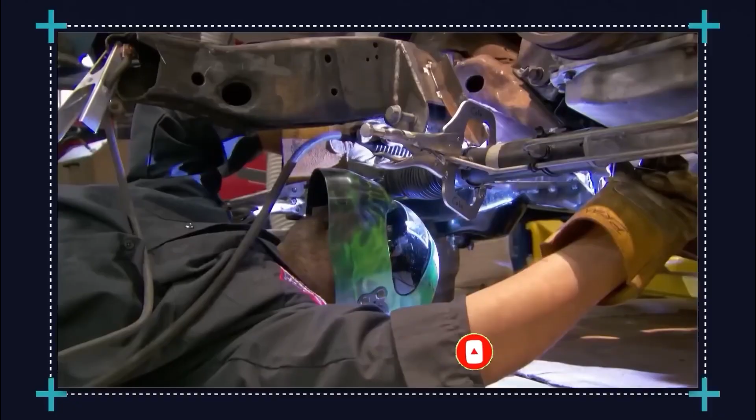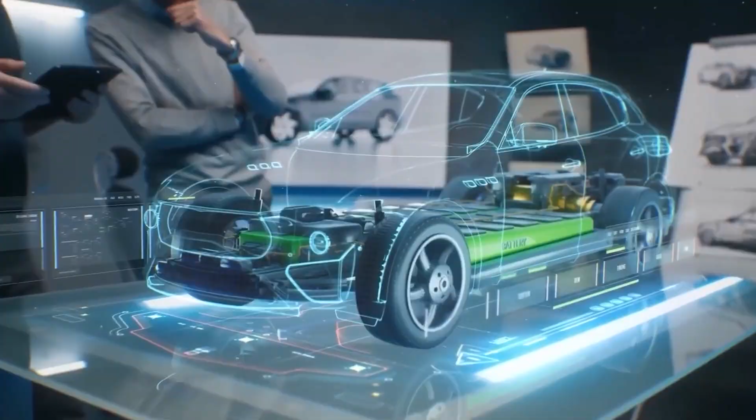It's very hard, this is a very hard thing. A technology so revolutionary it could reshape the entire automotive landscape. It's physically possible, so I think we can do it. Every truck that we put on the road that replaces a diesel truck is a huge amount of leverage, and so that is why we're doing this, and it makes a huge difference towards driving us towards our total mission of sustainable energy and transportation.

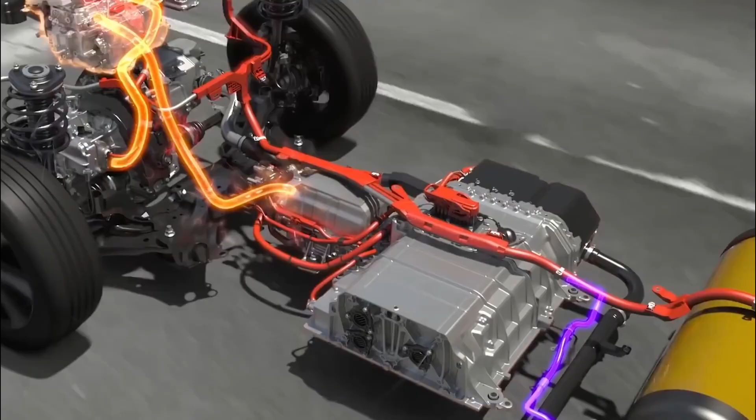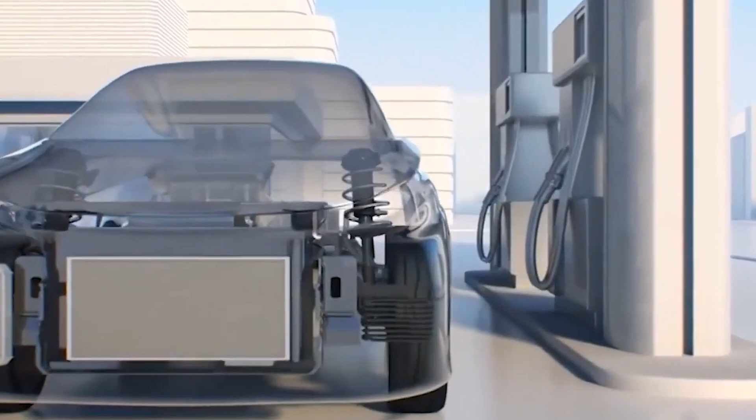Elon Musk, the visionary behind Tesla, SpaceX, and countless innovations, may be on the brink of doing just that. You know, people always want to know what our next product is. We are actually building a new product. We are actually designing a new product, two new products, that I think you will be very excited about.

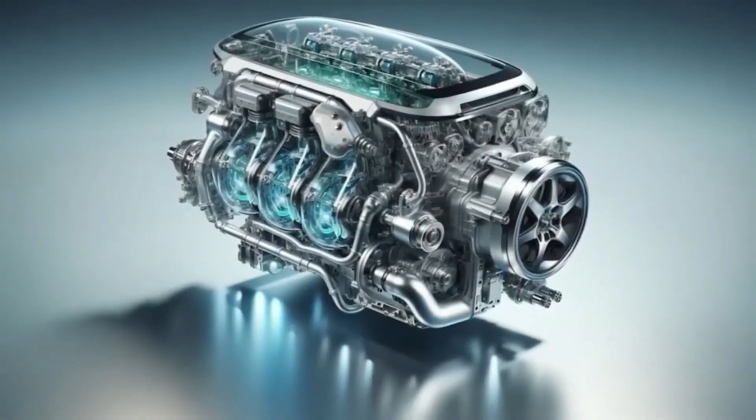Elon Musk's vision has always pushed the boundaries of what we consider possible. From electric cars to reusable rockets, his name is synonymous with innovation. But what if I told you that his next big idea could change the automotive industry in ways we never imagined?

Today, we're diving into the world of water-powered engines and discussing the rumors and facts surrounding Musk's reported interest in this technology. For years, the concept of water as a fuel has captivated scientists, engineers, and dreamers alike. The idea that something as abundant as water could power our vehicles, potentially eliminating the need for gasoline and reducing our carbon footprint, sounds like something straight out of a science fiction novel. And yet, as we'll explore, it might be closer to reality than you think.

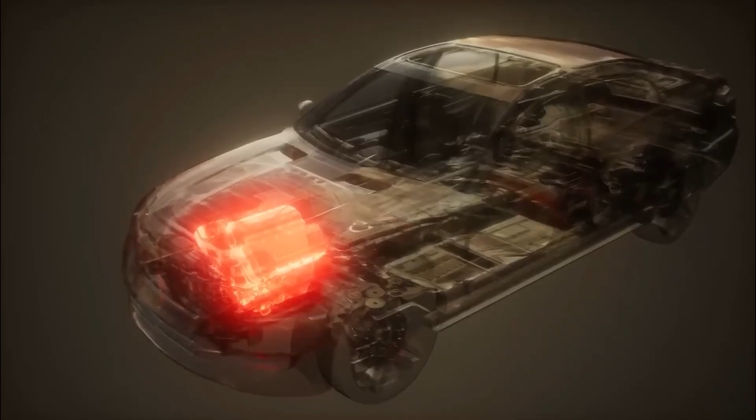Water-powered engines, or hydrogen fuel cells, represent one of the most fascinating alternatives to traditional fossil fuels. Unlike electric vehicles that run on lithium-ion batteries, hydrogen fuel cells generate electricity through a chemical reaction between hydrogen and oxygen. The byproduct of this reaction? Pure water. No greenhouse gases, no toxic emissions, just water vapor.

While the idea of using water to power vehicles sounds revolutionary, the technology behind it is complex. Hydrogen fuel cells split water molecules into hydrogen and oxygen through a process called electrolysis. Once separated, the hydrogen is stored in fuel cells where it can react with oxygen to produce energy. This process generates electricity that powers the motor, much like a battery in an electric car.

For years, hydrogen fuel cells were overshadowed by battery technology due to the latter's growing popularity and advancements in battery life and efficiency. Companies like Tesla, spearheaded by Musk, have invested heavily in electric vehicles, or EVs, effectively positioning batteries as the future of the automotive industry.

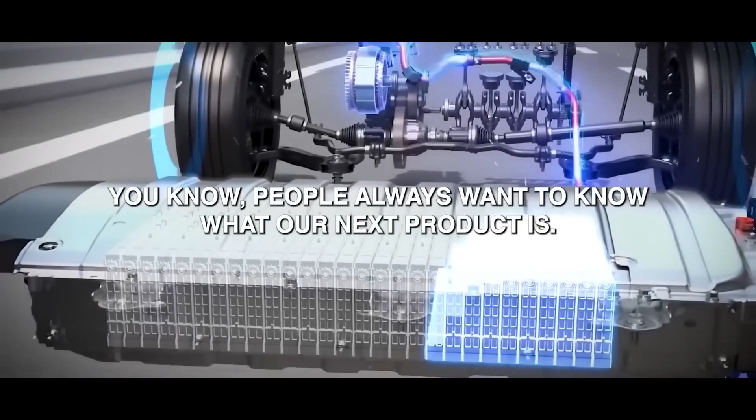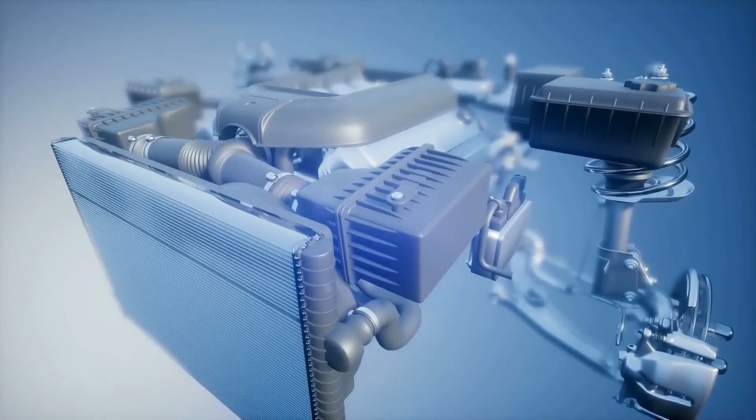However, with recent advancements in fuel cell technology and the increasing need for sustainable solutions, hydrogen is gaining traction as a viable alternative. But why would Elon Musk, a staunch supporter of battery-powered EVs, be interested in hydrogen fuel cells? It's no secret that Musk has previously dismissed hydrogen fuel cells, calling them 'fool cells' and a 'mind-bogglingly stupid idea.' Musk's primary argument was that hydrogen is inefficient compared to lithium-ion batteries, which he believes are the superior technology.

So what's changed? As Tesla continues to expand its product line and push the boundaries of innovation, Musk's perspective might be evolving. Hydrogen fuel cells offer unique advantages, especially in applications where battery technology faces limitations. For example, fuel cells can provide greater energy density and faster refueling times than batteries, making them an attractive option for heavy-duty vehicles like trucks, buses, and even airplanes.

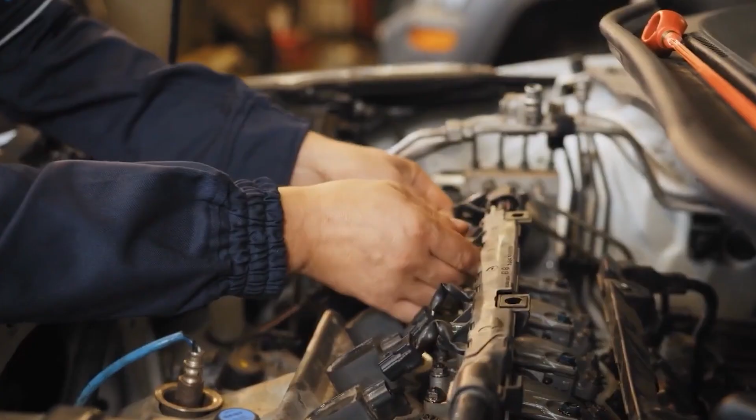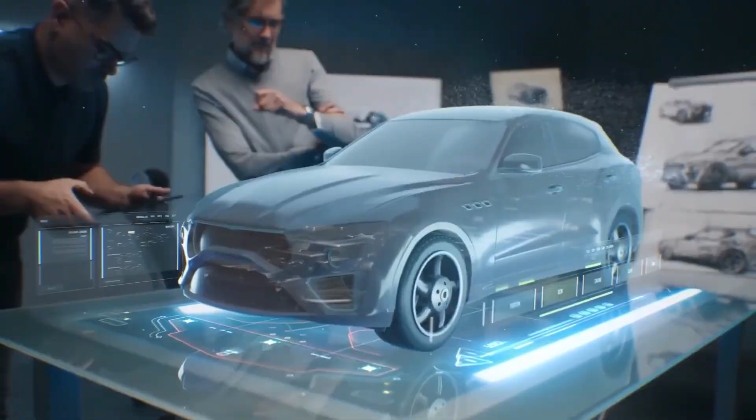In addition, hydrogen can be produced from renewable sources such as water through electrolysis, which aligns with Musk's goal of creating a sustainable future. Recent reports suggest that Musk has quietly invested in hydrogen research and development, possibly even exploring a water-powered engine concept for Tesla's next-generation vehicles. While Tesla has yet to make an official announcement, rumors are circulating that Musk's team is working on a prototype that could revolutionize the industry.

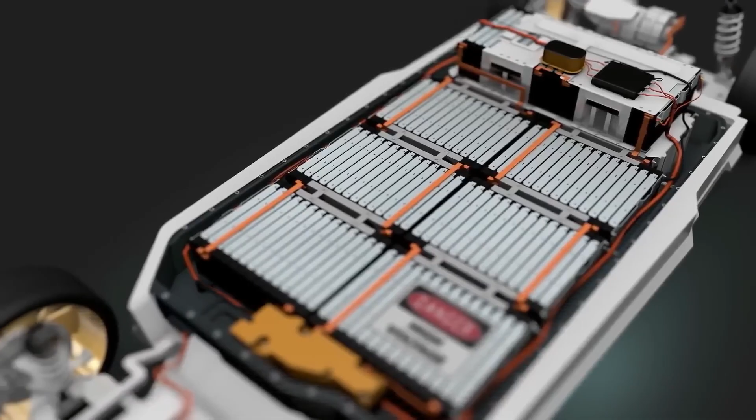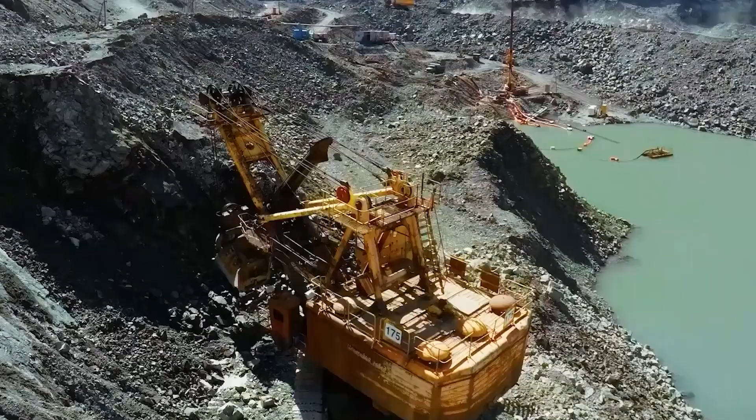If successful, a water-powered engine could eliminate the need for traditional fossil fuels, reducing emissions and making transportation more sustainable. The automotive industry as we know it relies heavily on gasoline and diesel, both of which have significant environmental impacts. The production and burning of these fuels release vast amounts of carbon dioxide, contributing to global warming.

Electric vehicles offer a cleaner alternative, but they still rely on electricity often generated from fossil fuels, and their batteries require rare materials that are challenging to mine and dispose of responsibly. A water-powered engine could change this equation entirely.

Hydrogen fuel cells produce only water vapor as a byproduct, making them one of the cleanest energy sources available. If Musk were to champion this technology, it could pressure other automakers to follow suit, potentially disrupting the entire car industry.

Imagine a future where our vehicles run on water instead of gasoline, reducing pollution and paving the way for a cleaner, greener planet. However, transitioning to hydrogen-powered vehicles is not without its challenges.

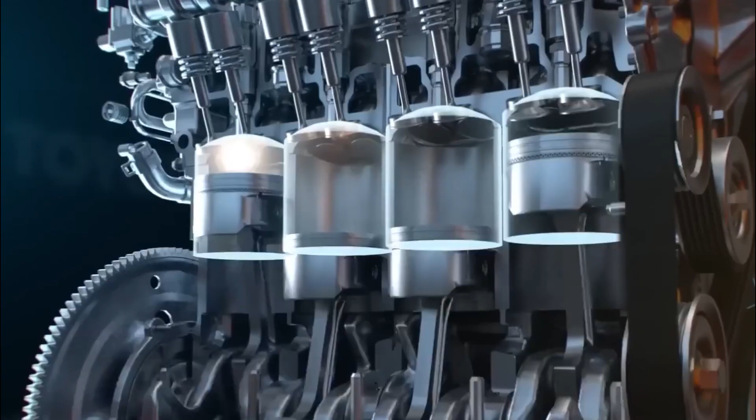One major obstacle is the infrastructure needed to produce, store, and distribute hydrogen on a large scale. Unlike gasoline or even electricity, hydrogen requires specialized equipment and facilities. Building a hydrogen refueling network would be costly and time-consuming, but with the right investments, it could become a reality.

Another challenge is the cost of hydrogen production. Electrolysis, the process of splitting water to obtain hydrogen, requires a significant amount of energy. If this energy comes from fossil fuels, the environmental benefits of hydrogen are diminished.

To make hydrogen truly sustainable, we would need to use renewable energy sources like solar or wind to power the electrolysis process. This would make hydrogen production both clean and sustainable, aligning with Musk's vision of a renewable future.

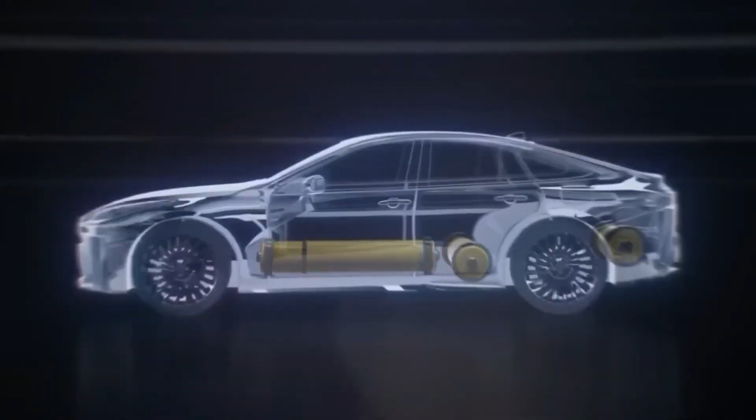If Elon Musk does indeed pursue hydrogen technology, it could accelerate the development of a hydrogen economy. With Musk's influence and resources, Tesla could lead the way in building hydrogen infrastructure, making it more accessible and affordable.

This would not only benefit Tesla, but also pave the way for other automakers to adopt hydrogen technology, creating a ripple effect throughout the industry.

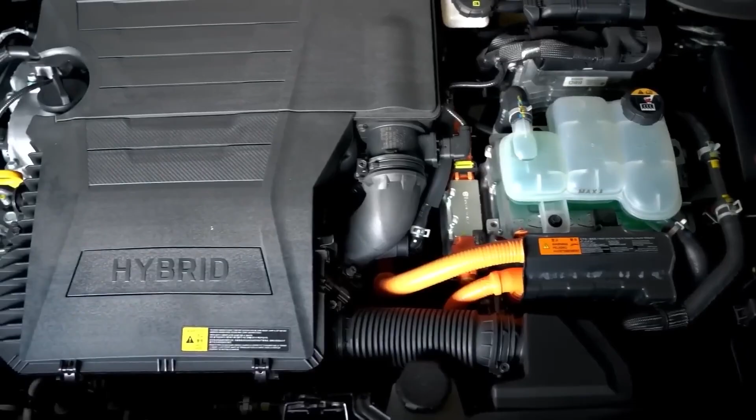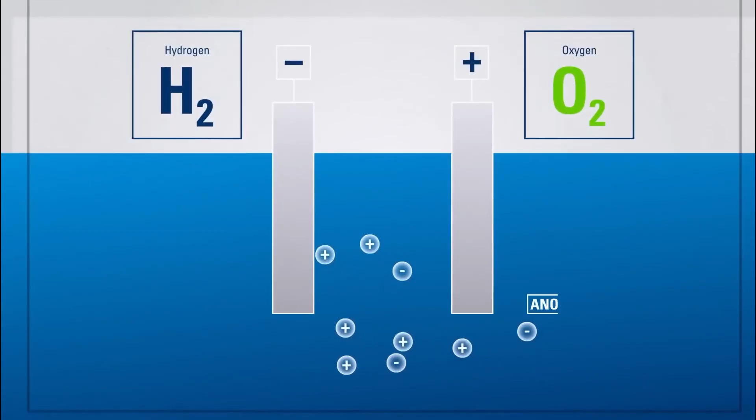In addition to hydrogen's potential in transportation, it could also play a significant role in energy storage. Renewable energy sources like solar and wind are intermittent, meaning they don't produce power consistently.

Hydrogen can act as a storage medium, allowing excess energy generated during peak times to be stored and used later. This could make renewable energy more reliable and scalable, further advancing Musk's vision of a sustainable energy ecosystem.

The concept of a water-powered engine is not new. Inventors and engineers have been experimenting with hydrogen fuel cells for decades, but the technology has faced numerous hurdles. Safety concerns, high costs, and lack of infrastructure have all hindered its development.

However, with Musk's track record of overcoming obstacles and pushing the limits of what's possible, he could be the catalyst needed to bring this technology to the mainstream.

Imagine a world where Tesla's water-powered engine becomes a reality. The impact on the environment, the economy, and society as a whole would be profound.

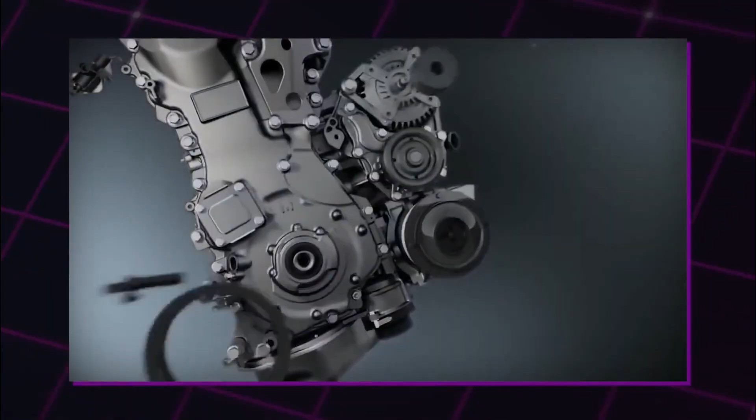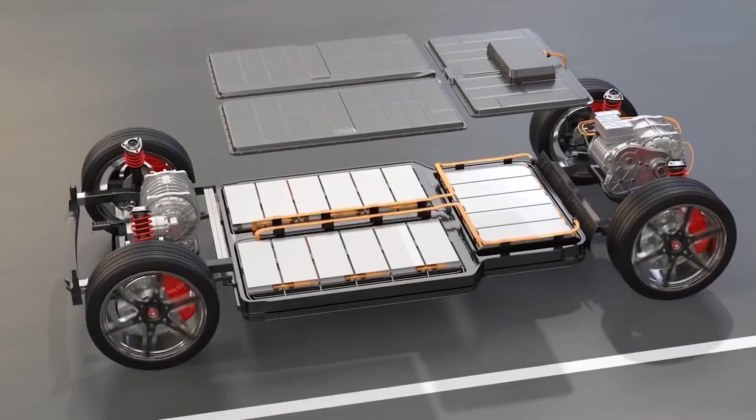Gas stations would be replaced with hydrogen refueling stations. Oil companies would face unprecedented competition, and the demand for fossil fuels would plummet. This could lead to a cleaner planet, reduced greenhouse gas emissions, and a more sustainable future.

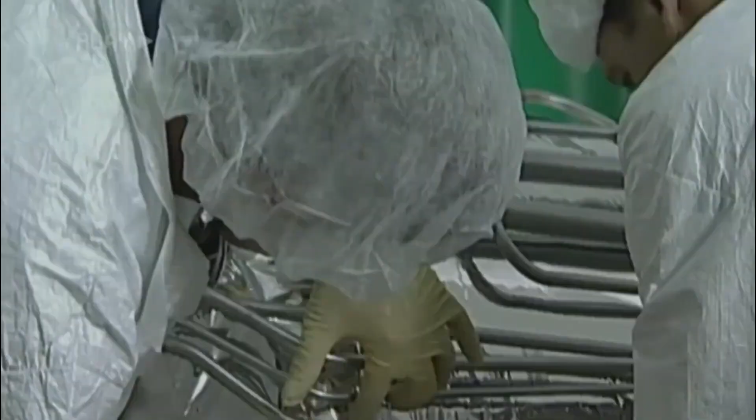We'll also explore the technical, economic, and societal shifts that could unfold if Tesla and Elon Musk move forward with this groundbreaking vision.

The topic raises many exciting possibilities for the auto industry, energy sectors, and global infrastructure, not to mention potential environmental and political ramifications.

So let's look at how this technology could disrupt traditional energy dynamics, reshape urban planning, influence geopolitics, and most importantly, redefine Tesla's role in the future of global transportation.

The mechanics of water-powered vehicles: how hydrogen fuel cells work. At the heart of this potential innovation is hydrogen fuel cell technology. To understand its transformative potential, let's first look at how it actually works.

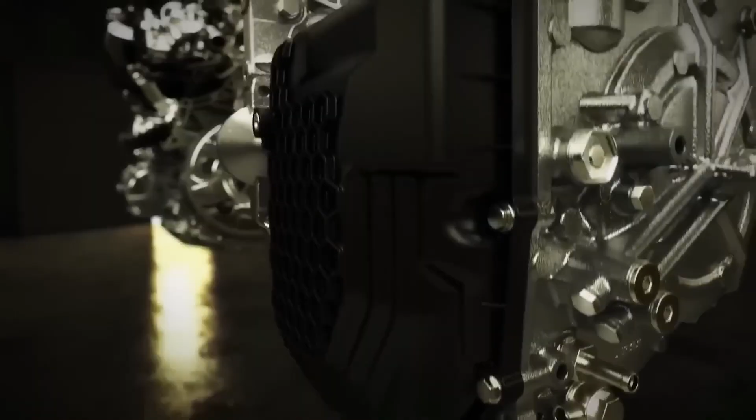Hydrogen fuel cells generate electricity through a chemical reaction between hydrogen and oxygen. In simple terms, the cell splits the hydrogen molecule into protons and electrons. These electrons are used to generate a current, which powers the motor and other systems in the vehicle.

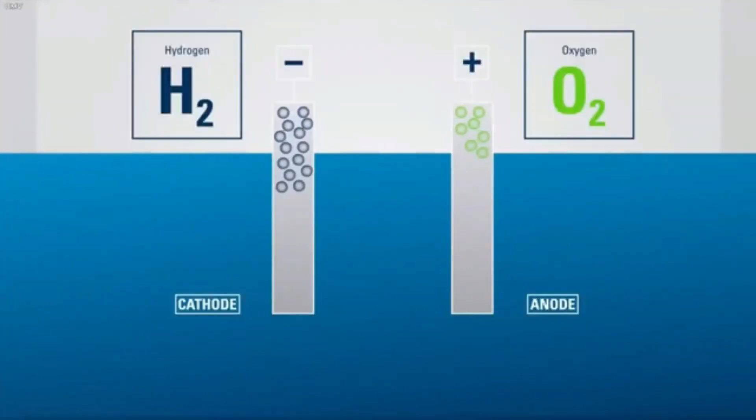The only byproduct of this process is water vapor, making it an incredibly clean energy source. When we think of water-powered engines, it's easy to get caught up in the idea of just adding water to a tank and driving off.

However, a more accurate description is that these vehicles would run on hydrogen extracted from water. Electrolysis, the process of using electricity to split water into hydrogen and oxygen, is essential here.

This hydrogen can then be stored and used in the fuel cells to generate electricity. While this process does require energy input, advances in renewable energy could make this part of a truly sustainable cycle.

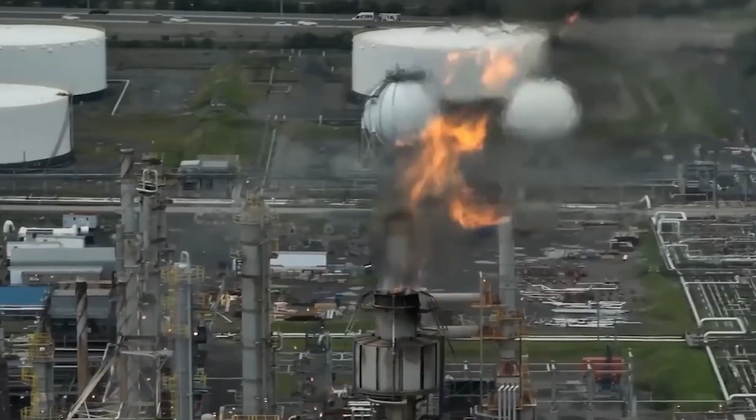Why Elon Musk may be reconsidering hydrogen fuel cells. Musk has historically dismissed hydrogen fuel cells, but his current stance on sustainable and scalable energy solutions may be evolving due to several factors: energy density and refueling time.

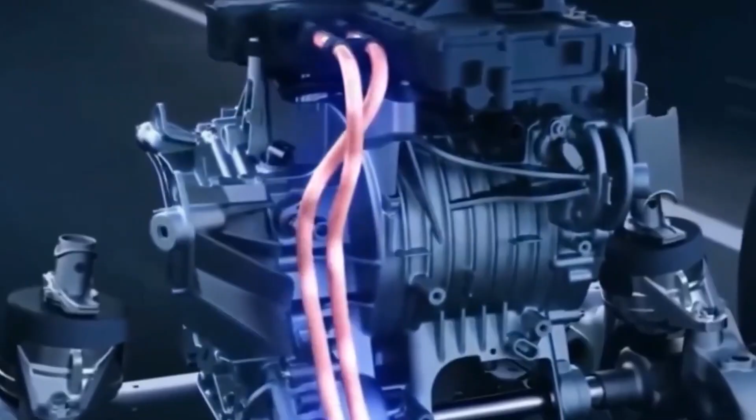Hydrogen fuel cells offer advantages over lithium-ion batteries in terms of energy density, which could make them ideal for longer-range applications. Refueling a hydrogen-powered car takes just a few minutes, compared to the longer charging times associated with electric vehicles, EVs. For commercial transport fleets, buses, and even airplanes, this reduced downtime is invaluable.

Environmental pressures and resource limitations. Lithium-ion batteries require minerals like lithium, cobalt, and nickel, which are finite resources. Mining these materials has environmental and ethical concerns, especially in regions where regulations are lax. As the global demand for EVs grows, sourcing these materials sustainably becomes increasingly challenging. Hydrogen, by contrast, is the most abundant element in the universe and can be produced from water, providing a theoretically unlimited supply.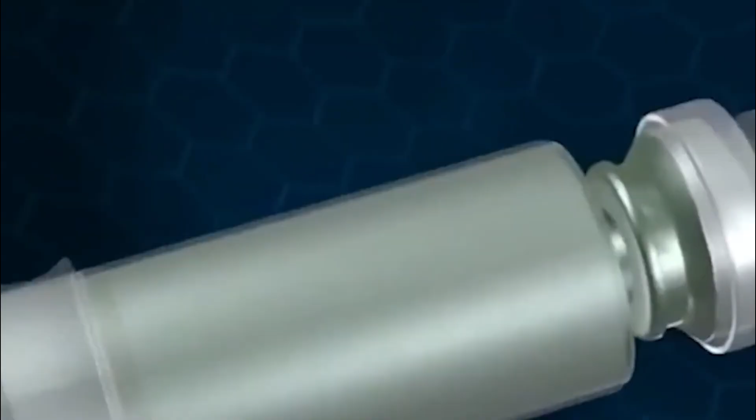Technical challenges and solutions in hydrogen vehicle adoption. While hydrogen offers vast potential, several technical challenges must be addressed before Musk or any automaker could successfully bring a hydrogen-powered car to market. Here's a look at some of the key challenges and how Tesla might address them.

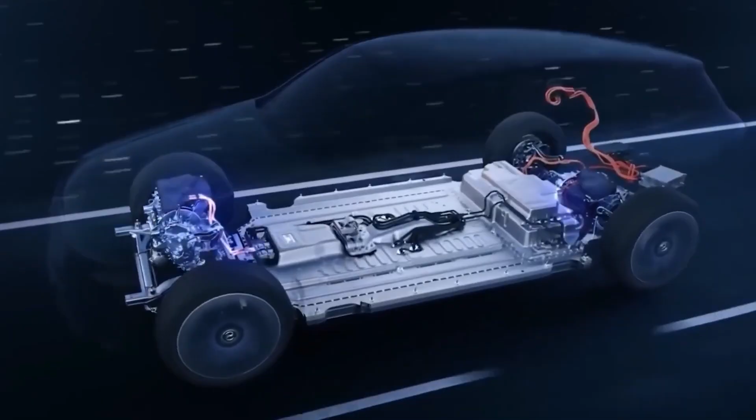Storage and distribution. Hydrogen is notoriously difficult to store and transport. It requires high-pressure tanks, and building a network of hydrogen refueling stations is a major logistical and financial challenge. However, Tesla could leverage its experience in building supercharger networks and potentially partner with energy companies to create a hydrogen refueling infrastructure.

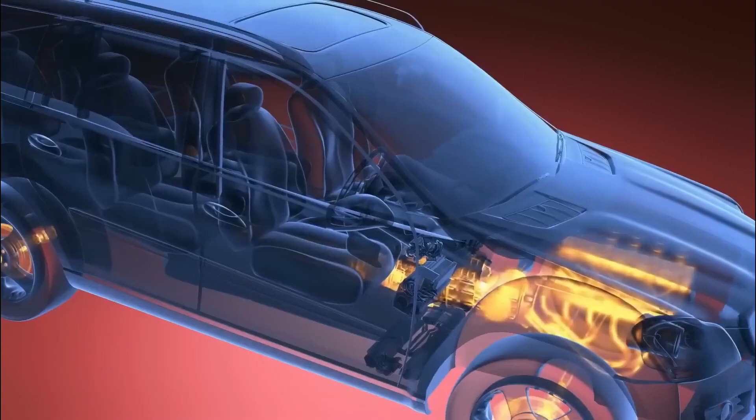Cost of electrolysis. Producing hydrogen through electrolysis is currently more expensive than extracting it from natural gas. If the electricity used in electrolysis comes from renewable sources, costs can be high and production rates can be inconsistent. However, advancements in solar and wind energy, along with potential subsidies for green hydrogen, could make electrolysis more cost-effective.

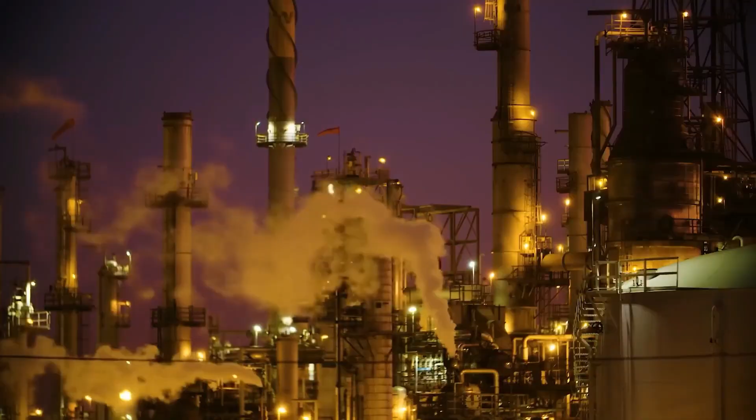Public perception and market demand. Battery-powered EVs have a well-established market, and convincing consumers to switch to a new technology is a challenge. Tesla's strong brand and Musk's ability to generate excitement around new technology could help overcome consumer hesitancy. By positioning hydrogen vehicles as the next step in sustainable transportation, Tesla could drive demand and shift public perception.

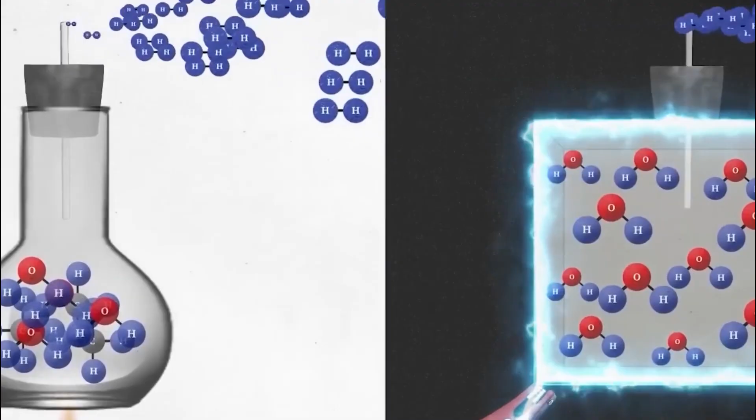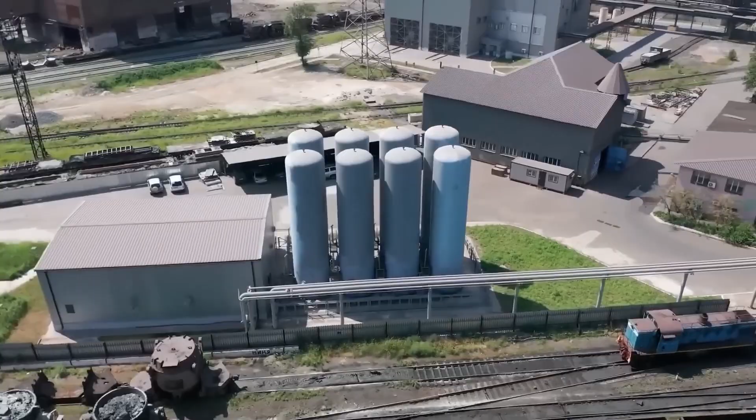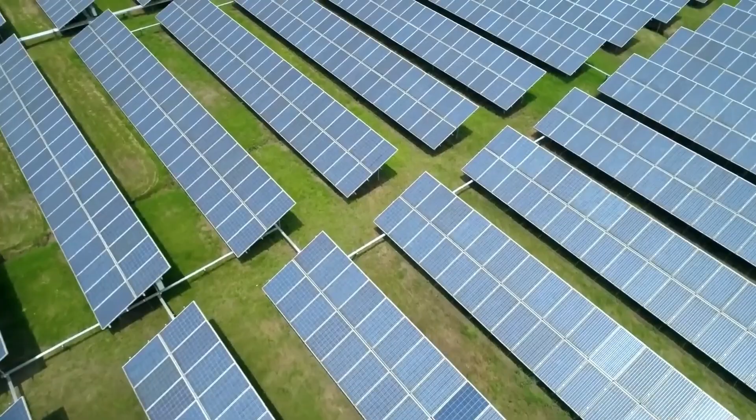Potential global impacts, geopolitics, and the hydrogen economy. Transitioning to a hydrogen-based transportation model could have major geopolitical ramifications. Here's how the adoption of hydrogen fuel cells could alter global dynamics. Energy independence. Hydrogen production can be localized, reducing dependency on foreign oil. Countries could produce hydrogen domestically, fostering energy independence and reducing vulnerability to oil price fluctuations. This shift could weaken the influence of major oil-producing nations and change the balance of power in global energy markets.

New alliances and trade networks. Hydrogen production could create new trade alliances and economic networks. Countries rich in renewable resources could become major hydrogen exporters, creating economic opportunities and fostering new relationships.

Environmental diplomacy. A global transition to hydrogen could drive international cooperation on environmental issues, encouraging countries to invest in sustainable technology and share innovations. This could have a positive impact on climate negotiations as nations work together to reduce carbon emissions.

Tesla's strategic position. How hydrogen could fit into Musk's vision. If Musk were to incorporate hydrogen technology, he would have the chance to redefine Tesla's position in the energy market and accelerate his vision for a sustainable future. Here's how hydrogen could align with Tesla's goals.

Energy as a service. Tesla could offer hydrogen as part of an energy as a service model. This would integrate with Tesla's solar and battery products, creating a comprehensive ecosystem where customers could generate, store, and use clean energy seamlessly.

Expanding market reach. Tesla's current EV lineup is primarily focused on consumers. However, hydrogen fuel cells could allow Tesla to target new markets, such as commercial and heavy-duty vehicles. Hydrogen's energy density makes it ideal for long-range and heavy-load applications, providing an opportunity for Tesla to enter the freight and aviation sectors.

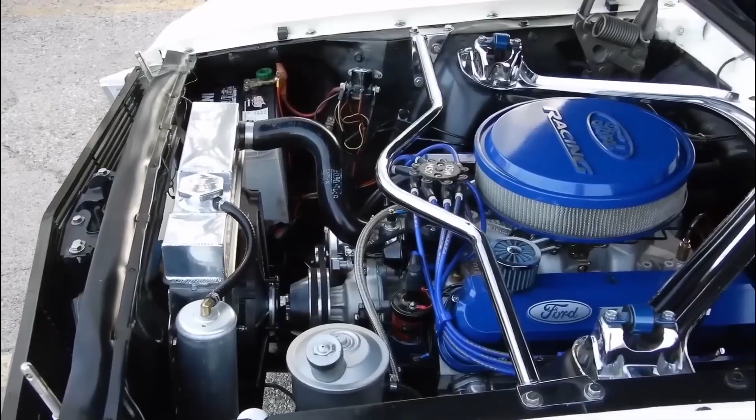Global leadership in sustainability. Adopting hydrogen fuel cells would reinforce Tesla's commitment to sustainability. This could attract environmentally conscious consumers and position Tesla as a global leader in clean technology, helping Musk achieve his mission to accelerate the world's transition to sustainable energy.

1. The science of hydrogen fuel cells, a closer look at the mechanics and chemistry. Hydrogen fuel cells, unlike traditional combustion engines or lithium-ion batteries, operate on the basis of an electrochemical reaction between hydrogen and oxygen to produce electricity.

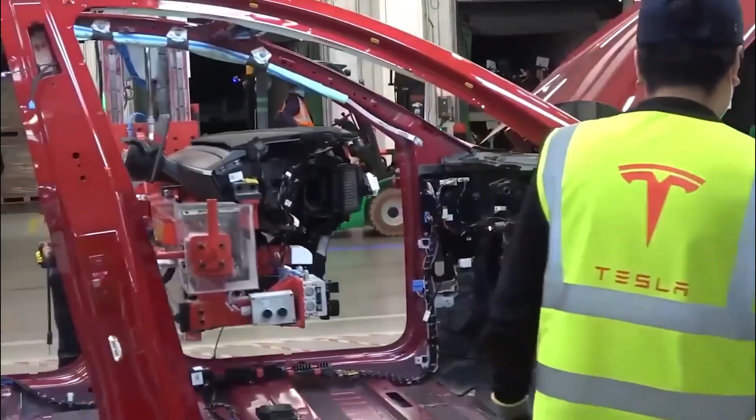At its core, the reaction strips hydrogen atoms of their electrons, creating both a current and water as the only byproduct. Let's dive into the technical aspects of this process.

To begin, hydrogen atoms enter the fuel cell's anode, where they are separated into protons and electrons by a catalyst, often platinum. The protons pass through a membrane to the cathode, while the electrons take an external circuit, creating an electric current. At the cathode, electrons recombine with the protons and oxygen from the air, generating heat and water.

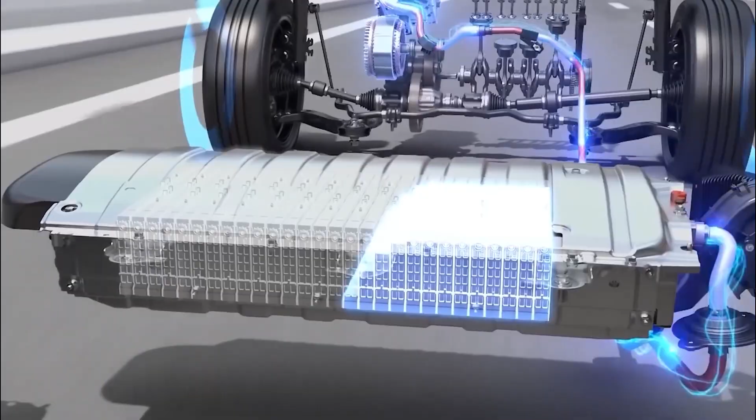Unlike combustion processes, which are about 25 to 30% efficient, hydrogen fuel cells can reach efficiencies as high as 60%, which is an enormous leap in potential energy utilization. Yet the hurdles are substantial. Platinum is expensive, and alternative catalysts are in development but remain less effective.

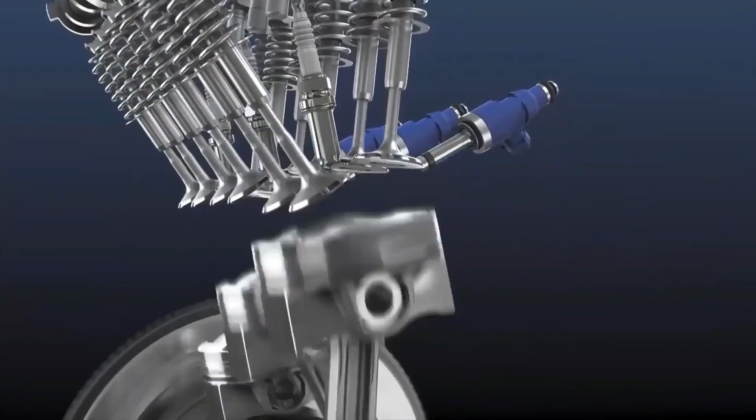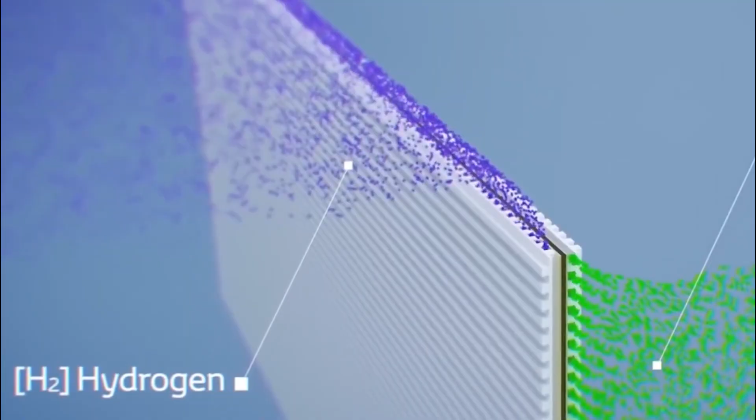Moreover, to store hydrogen, we require high pressures and extreme cryogenic cooling, both of which demand high upfront costs and specialized infrastructure. Thus, the push for cost-effective hydrogen storage and efficient catalysts is crucial for hydrogen fuel cells to become mainstream. Musk, who has championed battery electric vehicles, has previously expressed skepticism about the inefficiencies and infrastructure challenges of hydrogen. If Tesla pursued this avenue, it would require a revolution in production, storage, and infrastructure.

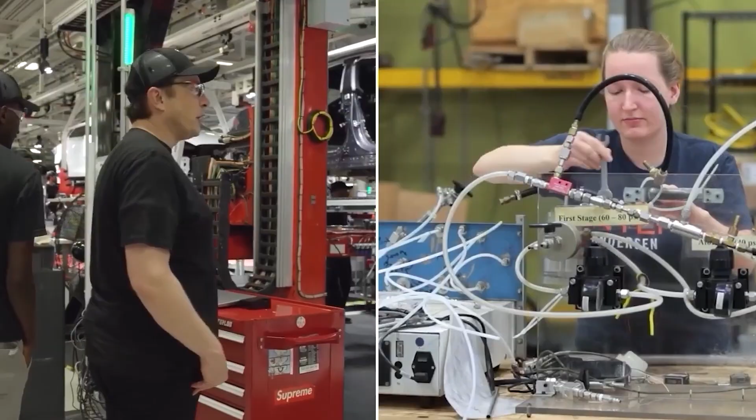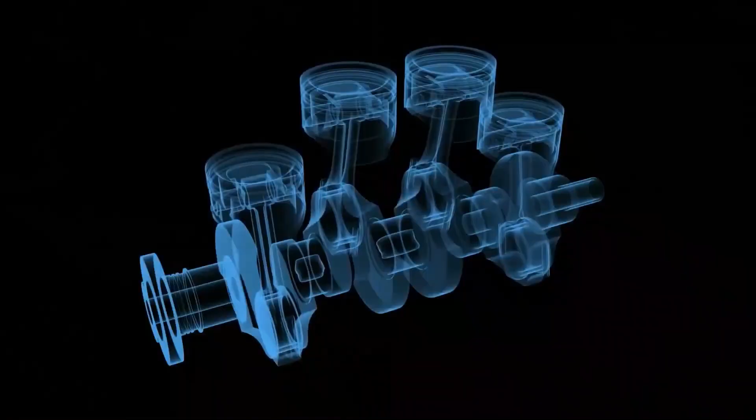2. Tesla's unique position to influence and innovate hydrogen infrastructure. Tesla is uniquely positioned to drive innovation in hydrogen fuel cell technology if it chose to do so. Through the supercharger network, Tesla already has experience developing infrastructure on a massive scale. Though hydrogen refueling is different, this experience is a significant asset. Building a hydrogen refueling network would require extensive investment and collaboration with energy providers, governments, and environmental organizations.

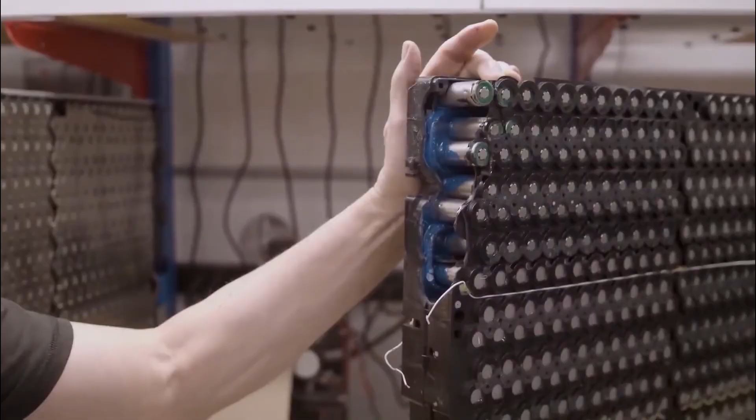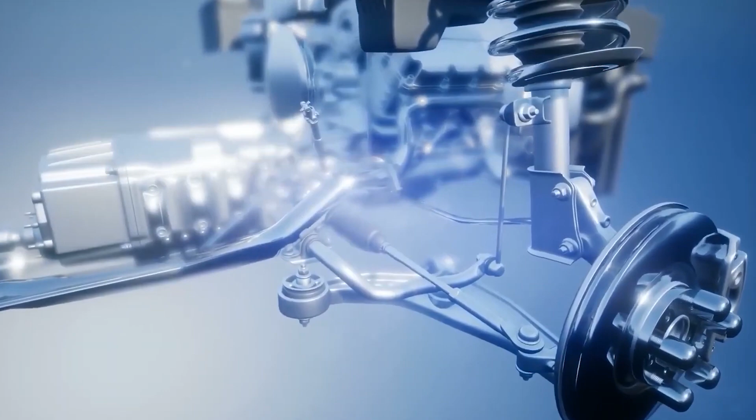Tesla's integration with SolarCity presents an intriguing opportunity. Imagine a setup where solar energy powers electrolysis at refueling stations, converting water to hydrogen on site in a carbon-neutral process. Such a setup would make hydrogen production sustainable and further decentralize energy. Tesla could use its experience in renewable energy and energy storage to make this model viable. Of course, such a vision requires the support of regulatory frameworks, government subsidies, and industry-wide collaboration.

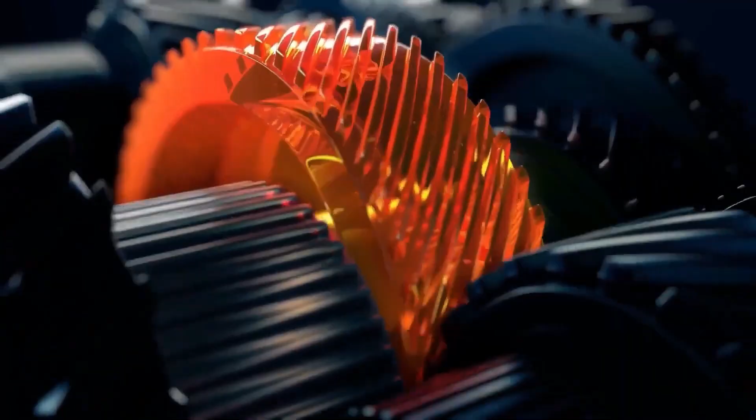Tesla could also partner with countries looking to transition to green hydrogen economies. For instance, Germany and Japan are investing heavily in hydrogen, viewing it as an essential element of their future energy strategy. By partnering with these countries, Tesla could help build out hydrogen infrastructure globally, bringing hydrogen refueling stations to major cities and highways. If executed well, this could even surpass the company's supercharger network in impact and scale.

3. Economic considerations, cost-benefit analysis of hydrogen versus electric batteries. Let's delve into the economic side of water-powered engines. While hydrogen has certain advantages over lithium-ion batteries, it's essential to consider the full cost-benefit landscape, from the vehicle's lifetime costs to the impact on energy markets and global economies.

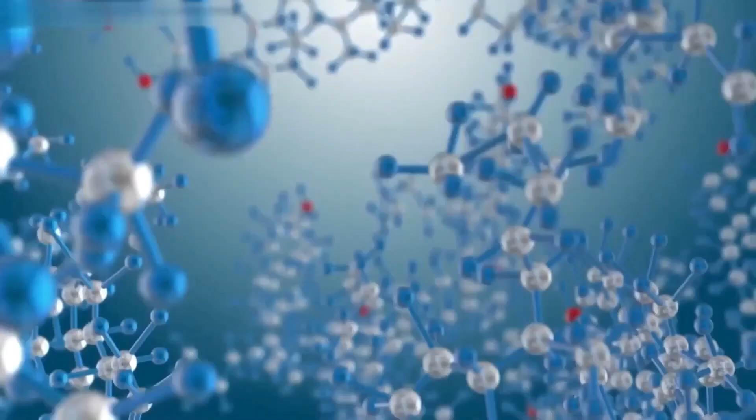Hydrogen vehicles typically require high initial investment costs due to fuel cell stack production, hydrogen storage, and refueling infrastructure. However, over time, advancements could bring down these costs, especially with the advent of alternative catalysts and improvements in fuel cell longevity. If Tesla or its suppliers could develop a fuel cell that costs less to manufacture and maintain, it would drastically shift the cost-benefit balance in hydrogen's favor.

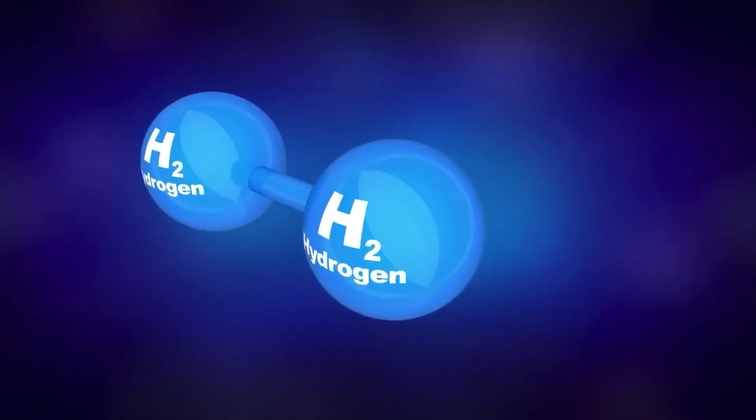The potential long-term savings on fuel costs make hydrogen a compelling option. In areas with abundant renewable energy, hydrogen could be produced for minimal costs during off-peak hours. This could lead to variable pricing models where hydrogen is cheaper at certain times, incentivizing off-peak refueling. Tesla could also offer a subscription model, similar to their full self-driving package. Customers might pay a monthly fee for unlimited hydrogen refueling, which would allow Tesla to manage costs effectively while providing predictable clean energy access for its users.

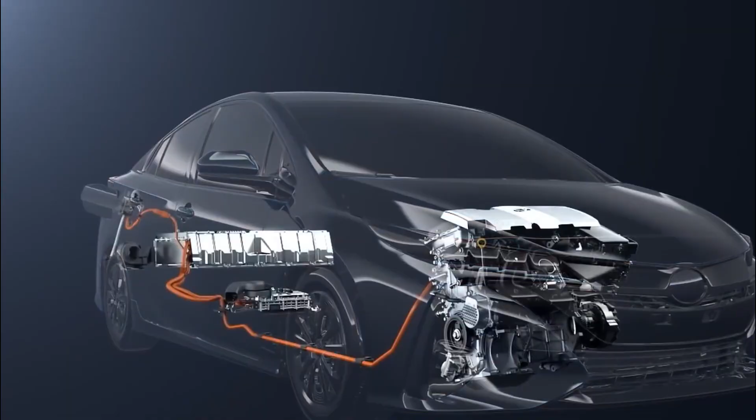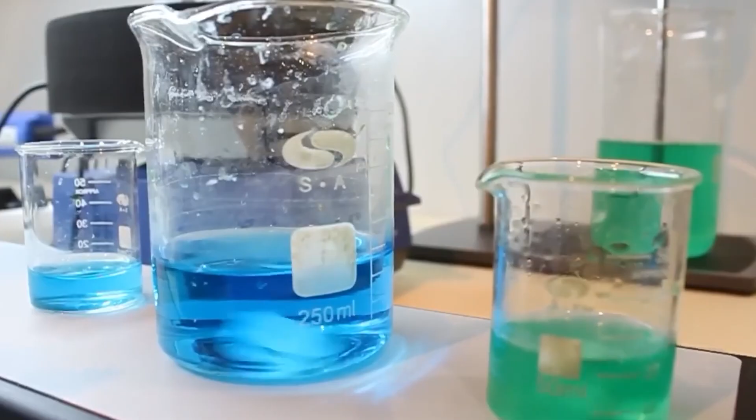4. Environmental impact, comparing life cycle emissions of hydrogen and battery electric vehicles. When we consider emissions, both direct and indirect, hydrogen fuel cells and battery electric vehicles each have strengths and weaknesses. Hydrogen fuel cells emit only water vapor, which is beneficial for urban air quality. However, the production of hydrogen, especially if derived from natural gas, can be carbon-intensive. The current industrial methods for hydrogen production, mainly steam methane reforming, emit significant CO2.

However, with renewable-powered electrolysis, we can produce green hydrogen, which has near-zero emissions. If Tesla were to invest in a green hydrogen supply chain, the life cycle emissions of hydrogen vehicles could drop below those of electric vehicles, especially in regions where the grid relies on fossil fuels.

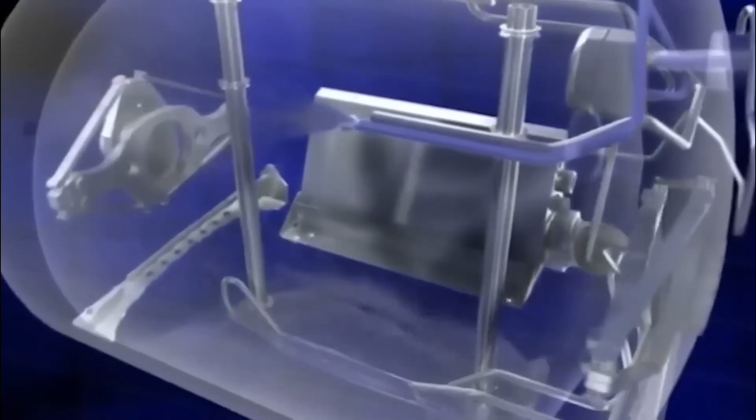Another consideration is resource extraction. Electric vehicles depend on minerals like lithium and cobalt, which have environmental and ethical concerns tied to their mining and extraction. Hydrogen fuel cells require rare metals like platinum, but at much lower quantities. Over the long term, green hydrogen could offer a cleaner, more sustainable alternative to battery EVs.